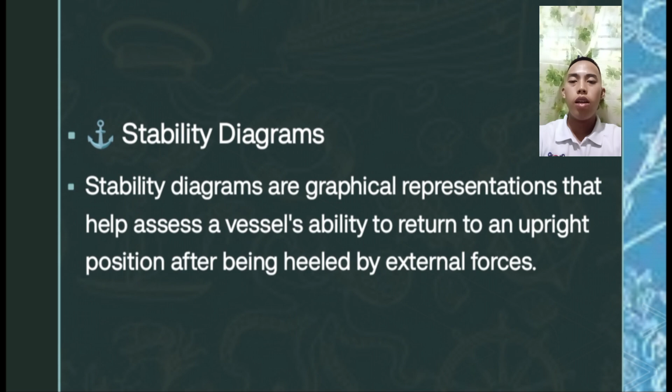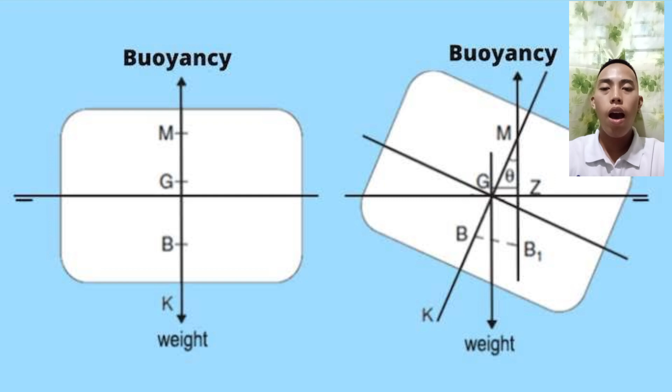A positive metacentric height, G below M, ensures stability, while a negative metacentric height, G above M, leads to instability and potential capsizing. The position of G can be changed by shifting cargo or ballast. The position of B changes with the ship's heel angle. The righting arm, or GZ, is the distance between G and Z, and is a measure of the restoring force. A larger GZ indicates greater stability.

Next, trim tables. Trim tables assist in determining how loading and unloading cargo at a specific location affects the vessel's trim, the difference in draft between the bow and stern. They provide correction to draft, adjustments needed for forward and aft drafts when weights are added or removed at certain distances from the ship's center. Trim calculations help predict changes in trim resulting from cargo operations, ensuring the vessel maintains optimal longitudinal balance.

So, what are trim tables? Trim tables are reference charts used to determine the change in draft at the bow and stern due to shifting, adding, or removing weight like cargo or ballast at various positions along the ship's length.

Their uses include ensuring even keel or desired trim for operational reasons or fuel efficiency, cargo operations, planning ballasting or deballasting, and avoiding excessive trim which can affect maneuverability and propeller immersion.

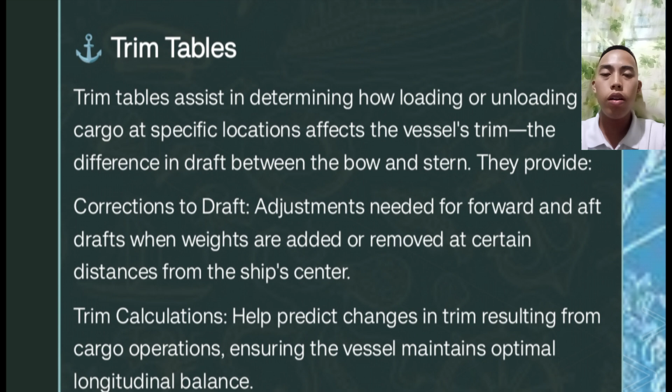Lastly, stress tables. Stress tables are vital for monitoring the structural integrity of a ship under various loading conditions. They provide information on still water bending moments, or SWBM, which indicate the bending of the ship's hull due to static loads. Shear forces represent the internal forces that can cause parts of the ship to slide past each other. Permissible limits define safe thresholds for bending moments and shear forces to prevent structural damage.

Stress tables are used to assess structural stresses like shear force and bending moment along the ship's length due to cargo, ballast, and wave action. Common stress data includes...

Shear force, or SF, vertical forces that act to shear the ship. Bending moment, or BM, measures the tendency of the ship's structure to bend. And hull girder stress diagrams, usually plotted from bow to stern.

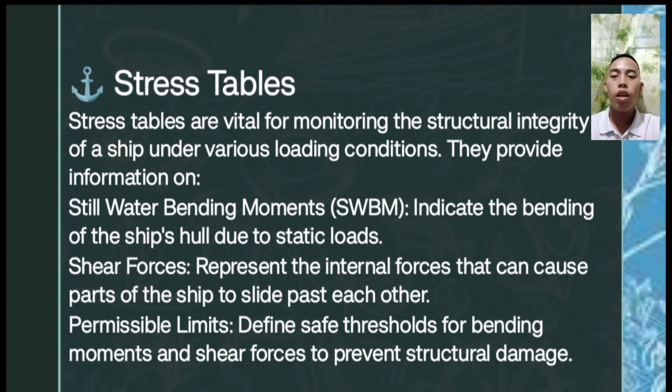The purpose of stress tables is to prevent structural failure like hogging and sagging, maintain longitudinal strength, and ensure cargo distribution doesn't exceed design limits. Thank you.